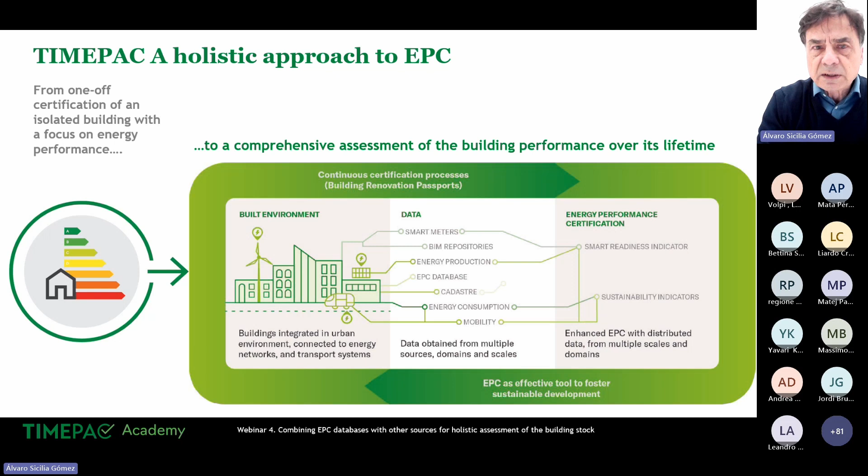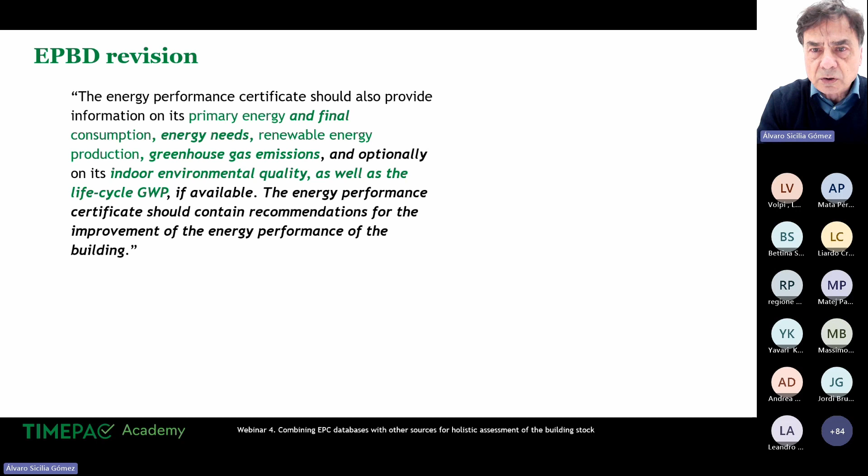So you can see it's no longer only about energy — it's also about comfort, and about sustainability issues, which are already included in the latest update of the EPBD.

In this context, when we are talking about EPCs, or energy performance certificates, we have to see it in a larger context in relation to other instruments. One of them is the Smart Readiness Indicator, which is in a testing phase now, and which aims to complement the EPC.

There is certain overlapping, certain complementarity between the two certificates that are now being explored. But even beyond that, when we consider sustainability in the larger context — the context where we are really operating when talking about energy performance or improving the building stock, sustainability as a whole —

then we have another framework, which is the assessment framework of Levels, which has also been in operation for several years.

And Levels is not a certification, it's an assessment framework to understand all the multiple dimensions involved in the built environment. So we have to see all of this in relationship, because together they conform an ecosystem where many elements are shared and connected.

There are databases, there are tools, there are methods, there are procedures, and all of them towards a common target, which is to achieve carbon neutrality in the building sector by 2050.

If we focus on the EPC here in this diagram, we see that in the EPBD directive, they're asking to store the EPCs in the databases. They're also asking member states to create national databases with that information, which should be connected to the European Building Stock Observatory. So there are very clear directions on how to deal with this data, how to store it, how to process it at the European scale.

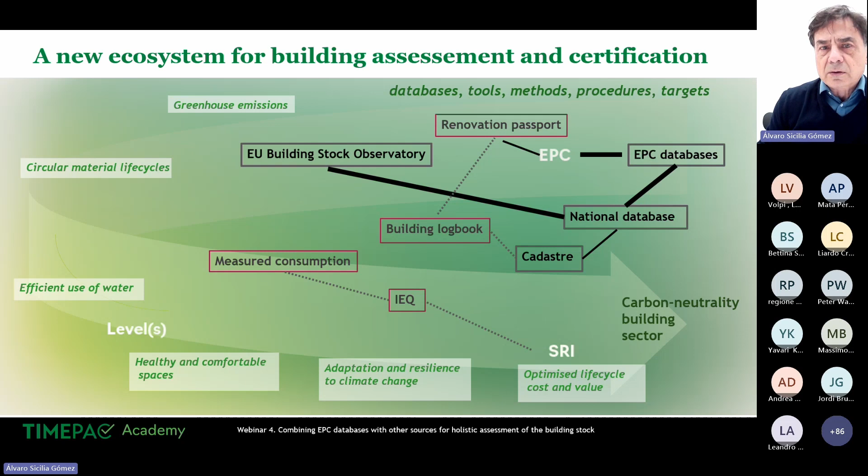This is the ecosystem we have to consider now when we talk about EPCs. Let's take a closer look at the content of each one of these instruments.

In the EPC, the information that should be contained, according to the EPBD, is here listed: primary energy, final energy consumption, energy needs, renewable energy sources production, greenhouse emissions, and if they are available, also the indoor environmental quality and the global warming potential. All of that just to put a label on the building.

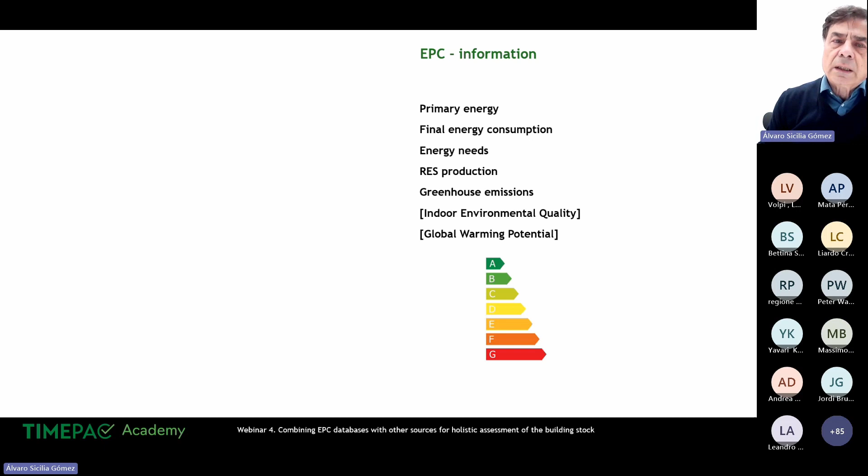But if we take a look at the impact criteria of the smart readiness indicator, the 7 criteria, we can see that there are certain coincidences, energy efficiency for example, but also similar concerns about comfort, convenience, and health. So it has to be solved how these 2 certificates, at the end, complement each other, something that is being explored at the moment.

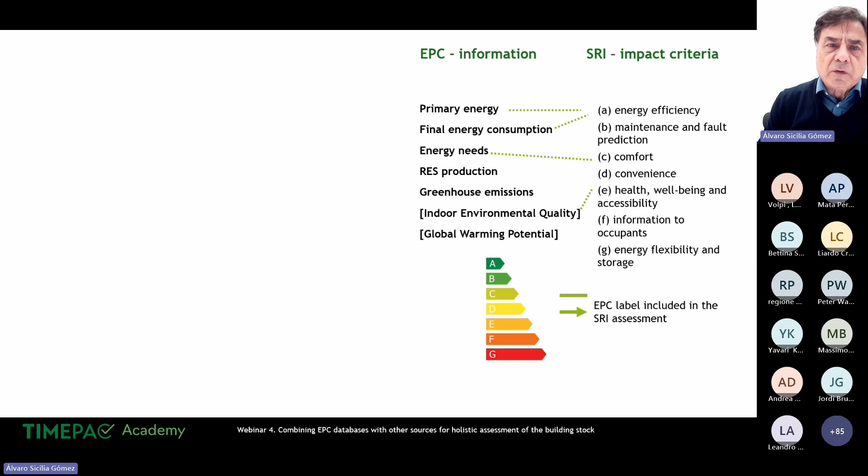But definitely the 2 aspects have to be part of the overall evaluation of the building performance. If we add now the 3rd one, which is the levels indicators, with all the indicators that correspond to the 6 macro objectives, then we have the overall picture. And we could even go larger and include here the 17 SDGs, the 17 Sustainable Development Goals, to have a complete picture of what we are dealing with when we are talking now about building certification and assessment in the context of sustainability.

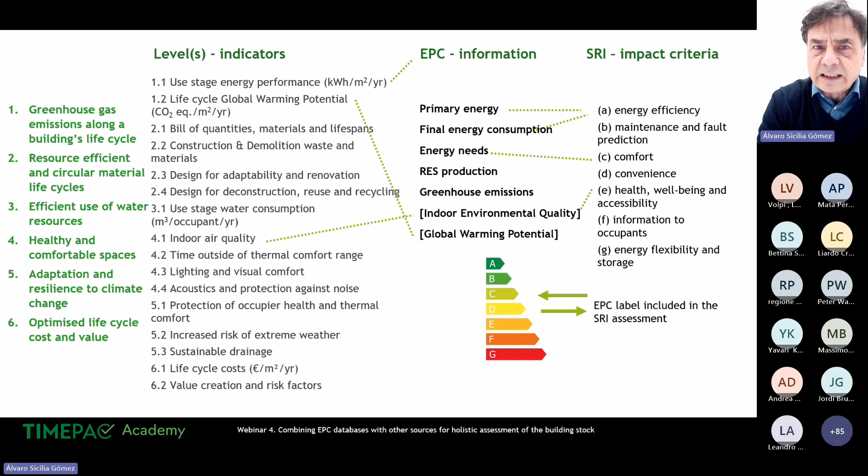So all of these instruments require data. And this data is found in databases from different domains, different scales. And this is where the data is stored, managed, processed, retrieved.

Each one of these instruments, SRI, EPCs, levels, rely on the existence of this data and the quality of this data and the curation of this data over time. So databases in all the different domains and scales are very important in order to implement these instruments.

As you can see here, we are talking about 2 kinds of interconnectivity here. We are talking about interoperability between databases, that, for example, the land register could be related to the EPC database in some way. This is a challenge at the national level.

This has to do with interoperability of databases, but there's also interconnectivity between assessment and certification tools, like the one I mentioned before, between EPC and SRI. Both things are related, of course, because the interconnectivity between the tools can be solved through the interoperability of the databases.

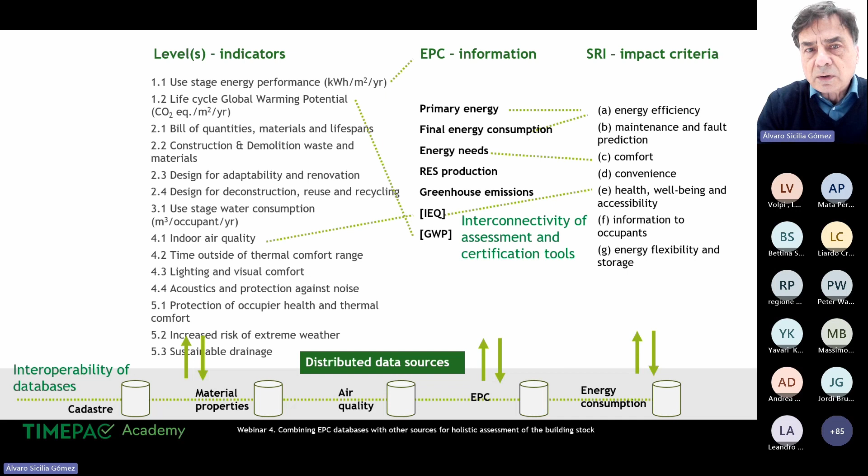So in a way, this diagram shows the important challenge for the future in order to implement all of this vision that is in the EPBD and to make it a useful instrument to achieve carbon neutrality for the building sector.

If you take a look at the latest recast, you will see that databases are mentioned several times. It's written that member states should store all the EPCs in specific databases, that these databases should be also interconnected between them at the national level, that they should also go up into the geographic scale connected to the European Building Stock Observatory. They're also talking about using building typologies or archetypes in order to store the data and use the data.

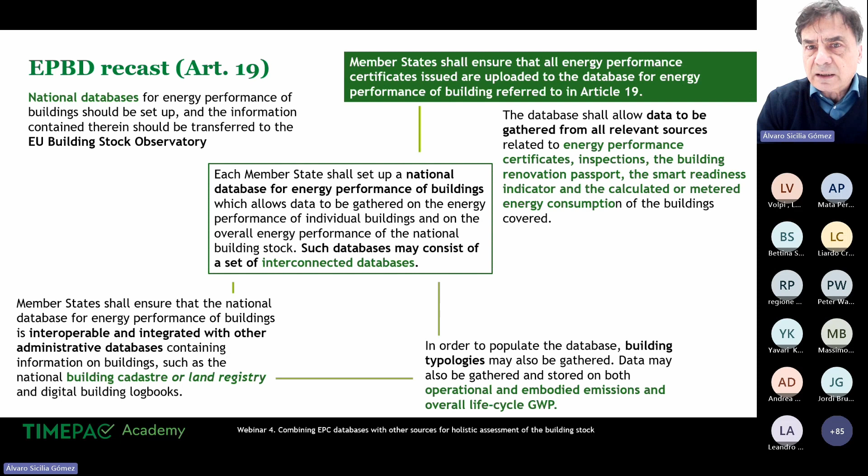So this is a very ambitious objective. It's in the legislation, but at the same time, it's a real research objective. And to be implemented, there are many issues here to be solved about interoperability, about managing the different databases, issues that we'll discuss today, some of them.

So as I said, TIMEPAC focus is on data. This diagram is from the proposal, a diagram that is already 4 or 5 years old. Our vision was that the data flow about energy performance should be a continuous, seamless flow between the 4 stages you see here: the generation of the EPC or certification, the assessment, the storage of that information in databases, the analysis of that information, and finally the exploitation of those analyses.

All of this is a continuous loop over time that at the moment presents many problems and challenges. At each of the stages separately, generation of the EPC is an issue - how to generate it in a more precise way with more accurate tools and data.

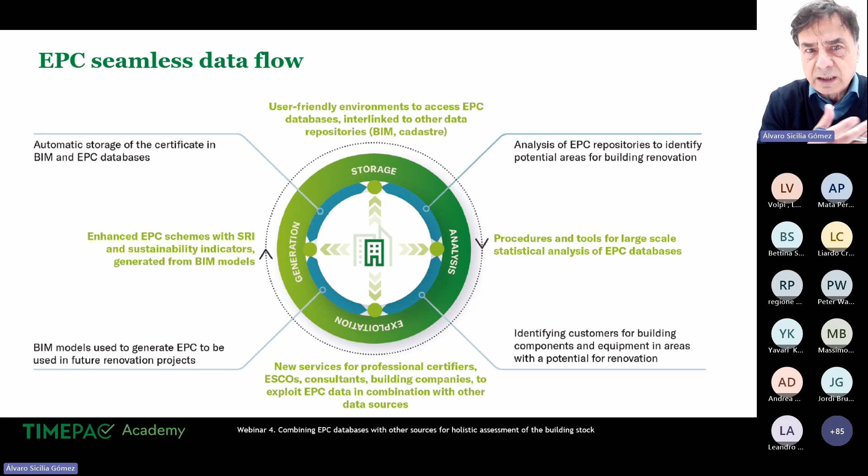The storage is also an issue. Not all the regions and countries in Europe have dedicated EPC databases at the moment. We need very powerful tools. Once these EPC databases exist, we need tools to analyze and understand, to transform the information stored in the databases into knowledge that can be exploited and used through services. To make all of these things connected and running fluently, there are many challenges at the moment, and these are the challenges we were facing in TIMEPAC.

The 5 scenarios: the first had to do with integrating certification tools with BIM. The second was to integrate consumption data, real data, into the EPC evaluation. The third was focusing on renovation passports and EPC. The fourth was about integrating new indicators, as the one we showed before, SRI and sustainability indicators. And the last one is about the procedures to exploit EPC databases and certification to develop large-scale renovation programs.

The webinars we have designed follow the same structure as the data flow I showed before. We have organized the webinars in four stages, starting with generation, following with storage, analysis, and finally exploitation. We have already delivered 3 of these webinars. We are now in the 4th, which has to do precisely with EPC storage, and also introducing the exploitation of that data, which will be developed later in more detail in other webinars.

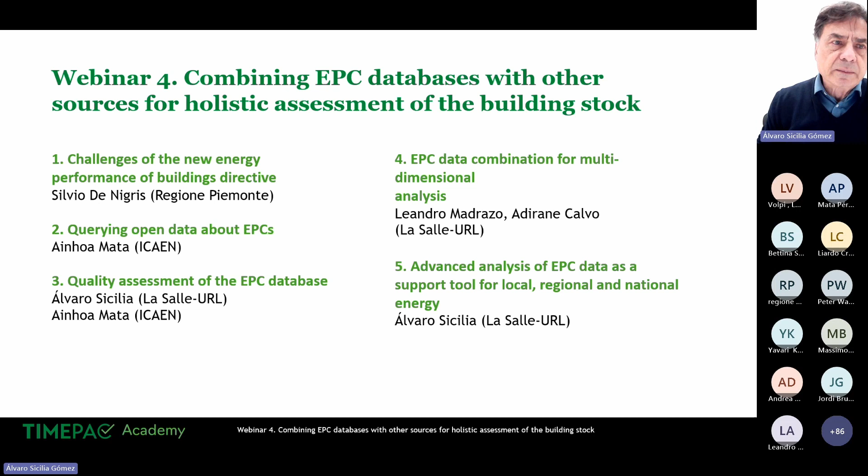I would like now to start with the first session and introduce my colleague, Silvio De Nigris, who will talk about the challenges of the new Energy Performance of Buildings Directive, which was just approved this Tuesday by the Parliament.

Regione Piemonte is the managing authority in charge of driving the energy transition towards a low carbon economy in this Italian region. It is the responsible institution for the management of the EPCs in Piemonte. Silvio is an environmental economist working on the promotion of energy efficiency and renewable energy at regional and local levels. He is involved in drafting the regional energy plan in Piemonte, and also serves as the contact person for the Covenant of Mayors. He has been involved in many European projects, some as a leading partner, often participates as a speaker in conferences at national and international level, and also lectures courses as an external expert. Silvio will give an introduction to some of the main issues included in the new EPBD and about the role of local authorities in their implementation.

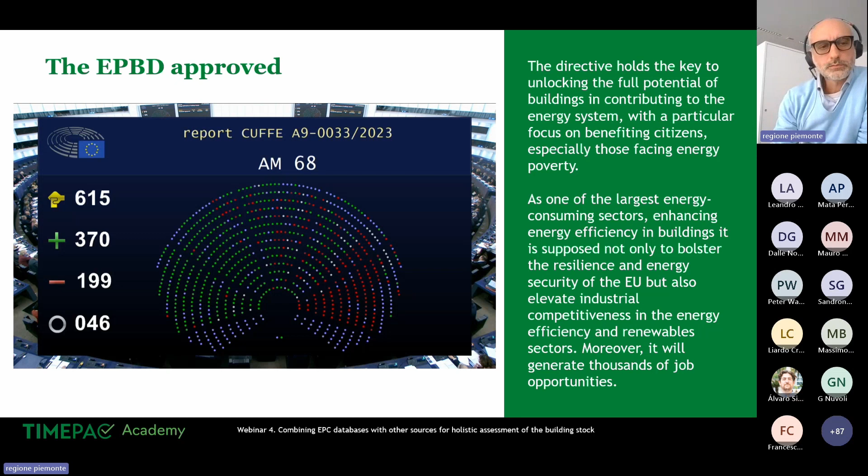It's not only a matter of energy efficiency and renewables, it's also an opportunity for the economy, envisaged as the creation of new jobs and relevant opportunities. But the challenge is very big, and as I will highlight, it's mainly for national government, but also for local governments as well. Let me point your attention to some key aspects that I found very interesting.

First of all, as Leandro already mentioned, member states should provide and draft a national building renovation plan. This should highlight the way member states are achieving carbon neutrality of the building sector by 2050. This is a major challenge that needs to go through several steps.

These plans are supposed to be sent to the Commission by the end of June this year for the first time, and will be updated every 5 years. They should fix intermediate steps and targets for 2030 and 2040. So as you can see, it's a process that is starting - it doesn't end until the target is achieved. It's not a matter of making a plan today and then seeing how to implement it, but it's plan, implementation, check, update, and plan again.

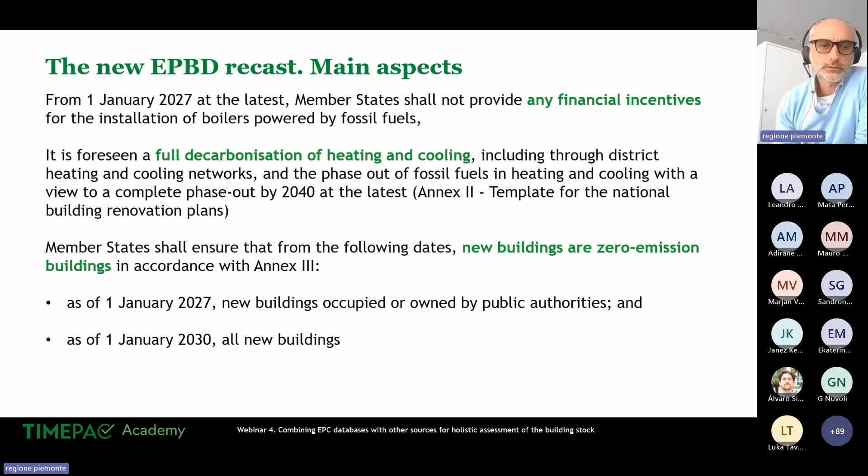As you can see, even here we are completely changing the paradigm and the concept of what is the reality today. New buildings are expected to be zero emission buildings from the 1st of January 2027 for public authorities or public buildings in general, and from 1st of January 2030 for all new buildings.

The EPBD updates the introduction of two other important tools that we started and tried to implement in the previous EPBD, which is the building renovation passport and the smart readiness indicators.

By the end of the year, member states shall introduce a scheme of the building renovation passport, based on a common framework provided by the Commission. What is important is that this building renovation passport for each building will comprise a renovation roadmap indicating a sequence of renovation steps building upon each other, with the objective to transform the building into a zero emission building by 2050.

So it's really a roadmap that we need to implement in each building in order to transform it into a carbon zero emission building by 2050 at the latest. It's a stepwise approach to the renovation of the building.

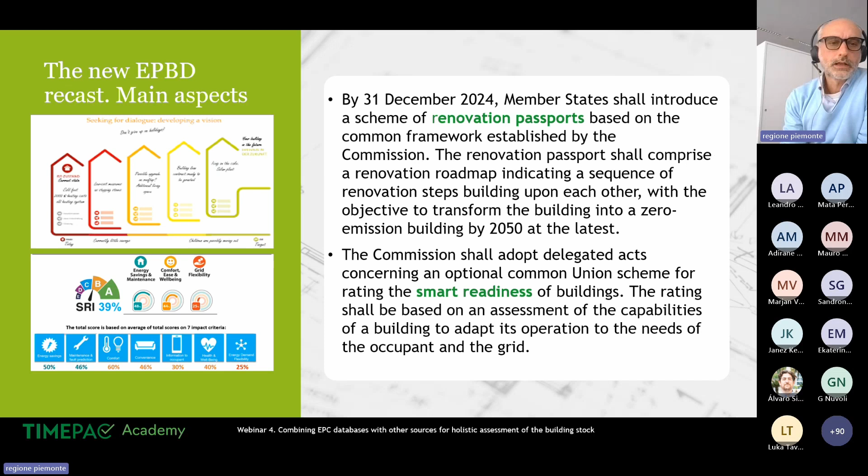For the energy performance certificate itself, it should be adapted to the new rules. What is important is that the A class shall correspond to zero emission buildings, and the G class shall correspond to the 15% worst performing buildings in the national building stock at the time of the introduction of the scale. So there should be a rescaling of the energy classes.

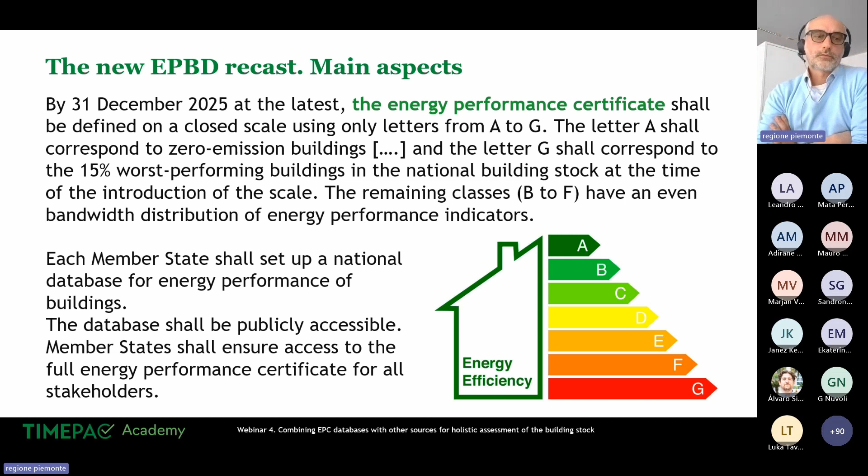As already Leandro said, member states shall set up national databases that should be as open as possible to all stakeholders - again, a call for data-driven actions for full performance and full renovation of the building stock.

We have the new EPBD, of course, but we also have another important step in the legislative revision of the European Union, which is the Energy Efficiency Directive that has been approved recently.

If I match this information with the fact that member states shall ensure that at least 3% of the total floor area of heated and cooled buildings owned by public authorities and public bodies at all levels should be renovated each year to be transformed into zero emission buildings, and that the public sector is also asked to provide at least 1.9% reduction in energy consumption each year compared to 2021.

There is really a new and urgent call for local energy planning at the local level. As I said in my introduction, this is not really energy planning, it's energy transition planning. We should really change our mindset when we make a plan - it's not about understanding the trend and what will come in a few years, but having a target which is a completely different energy system, and understanding how to get there, completely changing the current situation.

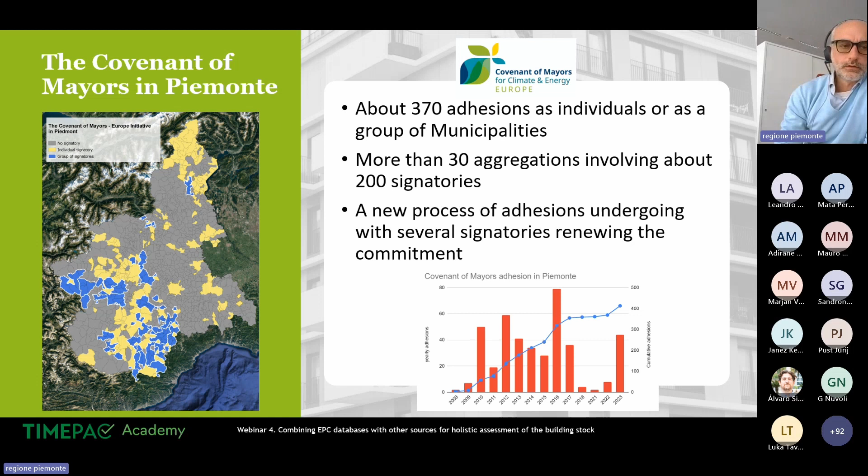But last year we had a promotional campaign to our local authorities, which was quite effective, and so we had newcomers in the network, and again we should improve this, because I think it's really important that municipalities do their job at local level, although they are small. In this case, we advise them to aggregate, so work together with neighbors in order to create some aggregation that makes planning at local level more easy and also effective.

What we do is support the municipalities in different ways in the planning process, for sure, providing them data and information, and in this way we are acting as a kind of energy observatory, and I will show you soon the concept behind. But we are also supporting them in the implementation phase of the plans with financial support while renovating public buildings, or also using European projects to implement new actions that can benefit municipalities directly.

Also the new concept of renewable energy communities is at the top of our priorities in this month, and we will try to push the change in different ways.

So I said we are acting as an energy observatory in terms of data. In the past we had this situation where several municipalities were asking data information from different data providers. This was quite a complicated situation where data providers were answering different requests coming from different municipalities. The concept that we introduced is to put ourselves in the middle.

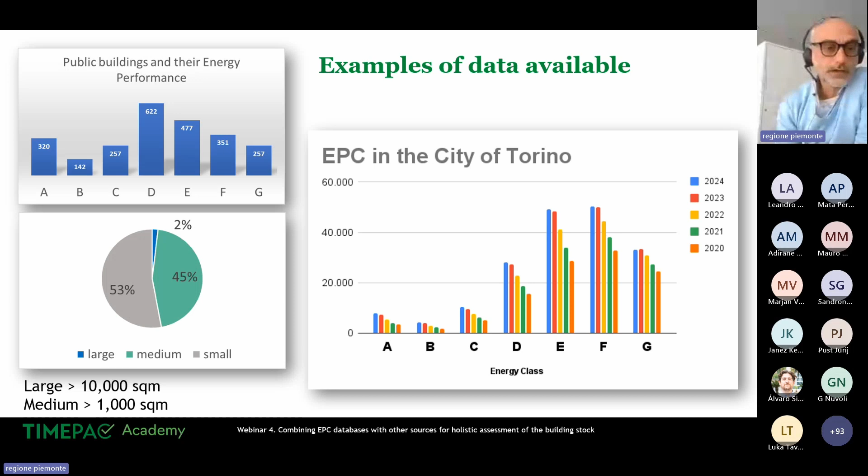So the challenge ahead is really huge, and we need to find a way to speed up the process as much as possible.

If I go with the takeaways: the call for planning is really strong from the EPBD and the Energy Efficiency Directive, and this is not only for national government but also for regions and municipalities. We need to stress the message that it's not something that member states can do themselves and alone. We should work in the same direction at every level of governance.

Data are essential to lead the process, and data should be available and provided in an open format as much as possible. But also, what I stress is that it's not a matter of just giving this data to municipalities, it's also about supporting them in understanding what they can do with it, and supporting them in the planning process, as we are trying to do in the best way.

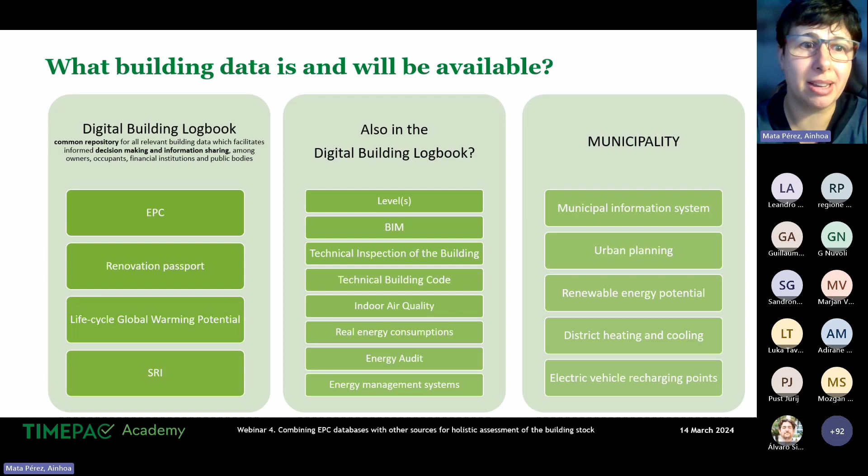The information set in the EPBD recast is that this digital building logbook will include the EPC and also the renovation passport, which will be a voluntary document. The different governments will have to develop it and give the opportunity to do this renovation passport, but the use of it will be voluntary.

It's a roadmap to achieve a big renovation, so that the existing building becomes a zero emissions building, in several steps, in order to renovate the whole envelope and the appliances. So we can do it in several steps in order to help finance the renovation.

And there will also be a new concept, the life cycle global warming potential. Nowadays, we know how many emissions are emitted during the use of the building.

Thanks to the EPC, it's a calculation, but at least we have some numbers. And we will have to calculate it during the life cycle of the building, from the materials to produce the construction products, the use, and also when we finish the use of the building. I think it will be included in the EPC, but we will see how the new versions of the EPCs will be.

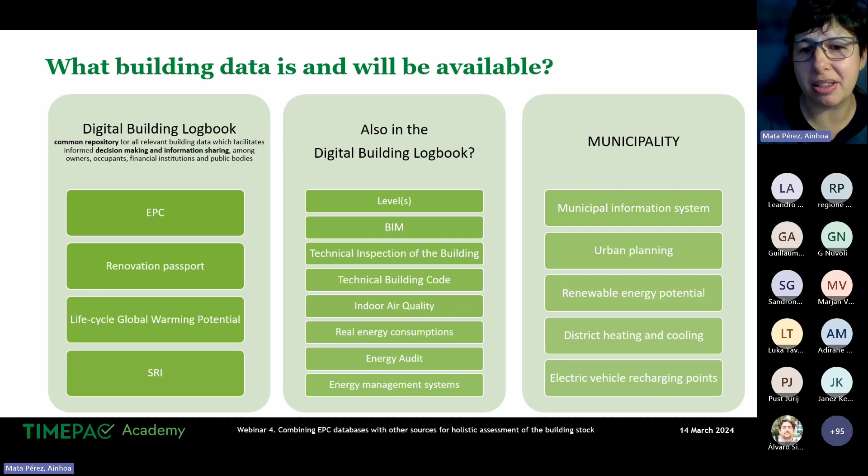So there's a lot of data, and we are, I think, on the way to get it. There's a lot to do, but I think we have also advanced a lot.

For example, when I started in ICAEN 15 years ago, we had the EPC register that had started one year ago, and all the documents and the EPCs were in paper. So, well, there's a lot of things to do, but we have also done a lot.

So there are different ways to access the EPC register in Catalonia, depending on what we want to get, and this is related to the user that wants the information. For example, the first way to get information is with the search engine, where we can look for one EPC at a time. We can search with the cadastre, the address, or the EPC code, and we can get the EPC without the personal data of the person that did it, and also the label.

So it's, I think, the most used part of the Catalan Institute website, because people want to get the label and the EPC — citizens that want to sell a house, EPC certifiers that have just done the EPC and need the label, or notaries that need to see if this label is correct, is registered, can consult this website. And it's aligned with the EPBD recast that tells us we have to give access to the data, and it's also aligned with the digital building logbook.

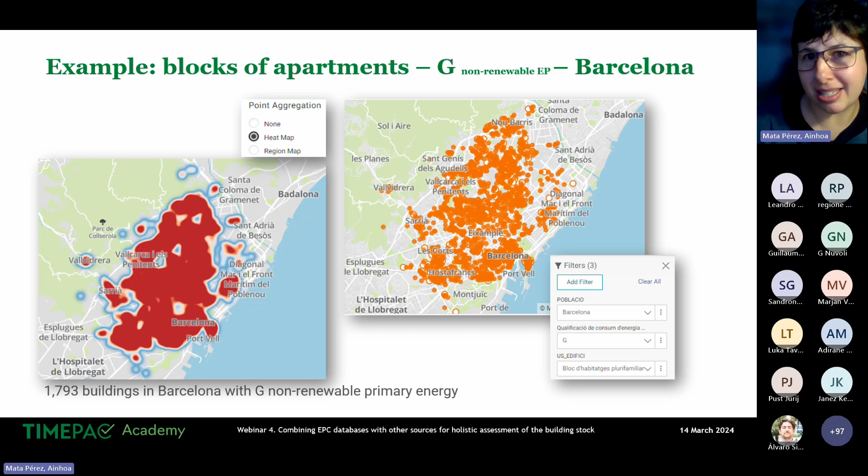We can see not only graphs but also a map with the same type of consultation using open data. This is a consultation about block apartments, not all buildings, but only block apartments that have a G rating with non-renewable energy and primary energy, from Barcelona. For those who know Barcelona, we see a difference in the number of G labels because, for example, there's a neighborhood called Poblenou that is newer than the rest, and they have fewer G labels.

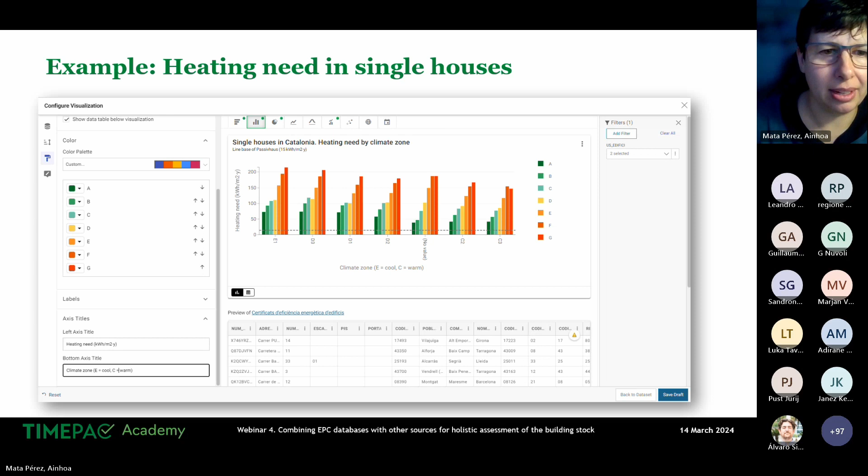And some takeaways: nowadays we have the EPC register in open data. It's aligned with the EPBD recast that says we have to have transparency with the data, but we have a lot of challenges. For example, to learn how to use this open data so it can be useful for different people. I don't know about citizens, but I'm sure it can be very useful for ESCOs, for public bodies, for EPC certifiers.

And we also have to relate the data much more, not only with the cadastre. The way, when we'll have more data in open data, we can also make these relationships with the EPC. And it can be very useful for the National Building Renovation Plan, as the EPBD said.

Also, there will be some questions that I don't know how will be resolved, but with the EPBD recast, there will be a new scale of the EPC. So we'll see how we have this relationship with the existing buildings that already have a scale, a label, and the new ones, we'll see. And one thing we'll speak on now is how to improve the data quality, which is really important to get trust in it.

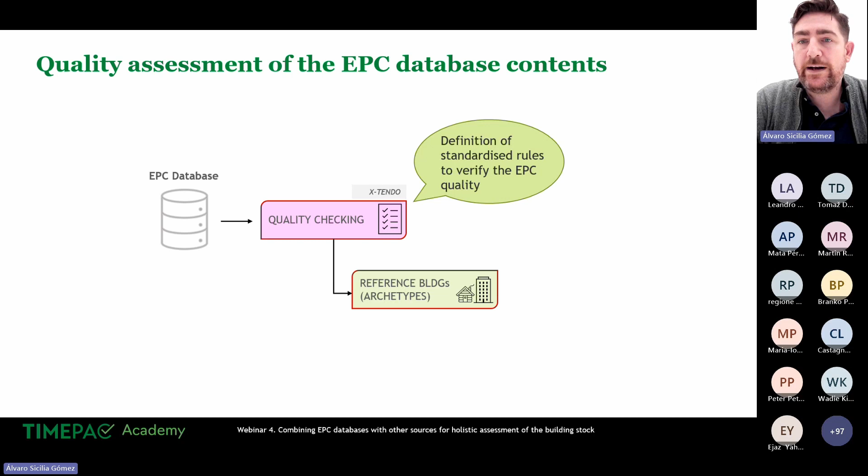For this quality checking, we created some validity rules to understand, for example, if the data type is okay or not. For example, for the year of construction, I am expecting a number between 0 and 2024. If I see a text, then this is wrong. If I see a decimal value, this is also wrong. So this is the kind of rules we are checking. Also inconsistencies, like having a heating system in my building but the heating demand or consumption is 0, for example, and also physical impossibilities.

These are the critical parameters that we are checking: building use, year of construction, heating volume, refrigerated volume, heating demand, the consumption, and the performance.

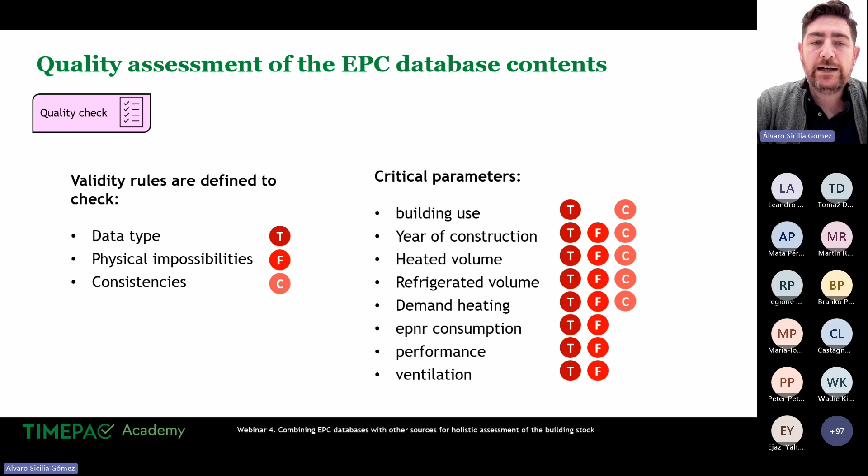I wanted to show you one of these examples. These rules were created with a tool made by the Politecnico di Torino team, an Excel tool that you can use to check if the EPC is okay or not. There are several formulas checking more than 100 columns to carry out this assessment. We translated this tool into SQL, which is the language for talking with databases, because the database of Catalonia is very big.

I already mentioned that there are more than 1,400,000 certificates. So here you can see one rule.

The rule is the following: if the building is heated, then the heating surface and the heating volume have to have a value, and the height of the space should be greater than 2.5. This is according to one of our regulations.

Here you can see the code, which I'm not going to read because it's not the point, but you can see that we are checking different things: if it is 0, if it is not null, if it is the division, and so on. So it's work that is hard to do, but at the end it has rewards.

Another rule is the heating efficiency rule. Here we check if the building has a heating system, then the efficiency should be greater than 0 or not null, so it has a value. Or if the heating system is not in the building for whatever reason, then the efficiency should be 0 or should be null. So these are other tools, other rules for checking all these EPCs, if they are okay or not.

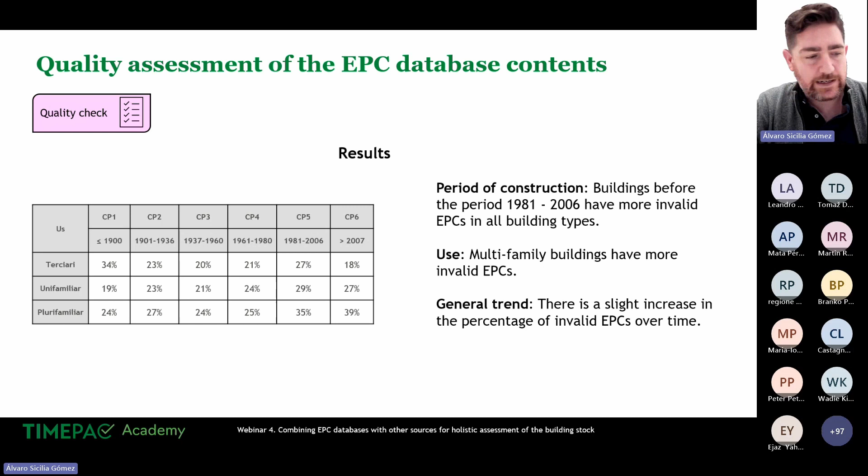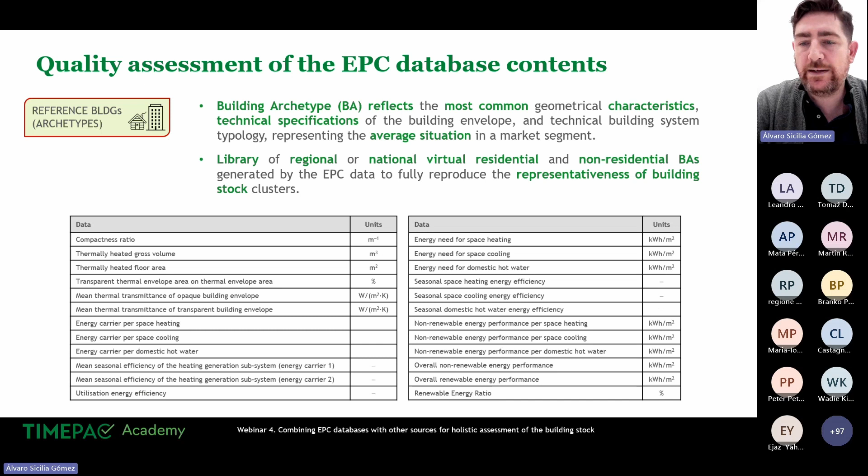Since I am running out of time, I will go ahead. Another tool that we have to carry out the building renovation programs are the archetypes, the reference buildings. In the TIMEPAC project, we defined several archetypes for every region. It's work that was led also by the Politecnico di Torino. Here in Catalonia, we developed more than 20 different archetypes based on different years of construction and different properties. This will be further explained in the next webinar, next Wednesday.

So now I pass the word to Ainhoa to explain the quality of EPC in the Register of Catalonia. Thank you. Thank you again.

Well, it can be very broad to think about the quality of the EPC. How can we improve it, and who has to do it? Because we have the register, but the information comes from all the EPCs done by certifiers. So one important point is that the information they introduce in the tools is correct. The part of the training, I think, is really, really important to get this quality of information.

Nowadays in Spain, there's no compulsory specific training to become an EPC certifier. It depends on your background. If you are an architect or engineer, you can do the EPCs. This could change in the future because there's a new regulation that will tell us exactly if there's compulsory training or not. We'll see.

And there's another part: the EPC certifiers tell us that the EPCs should be better paid, so we can dedicate more time to get this quality of the EPCs.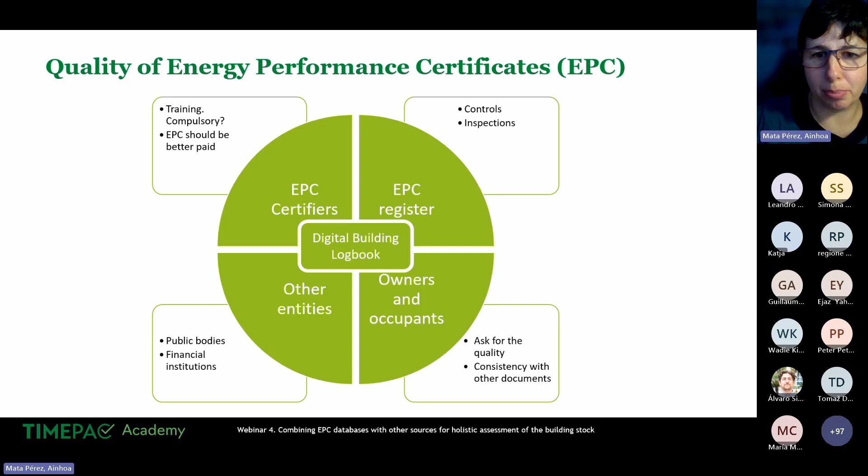In the EPC register of Catalonia, we have a website with a lot of information. In fact, last year we were in a project where citizens and also EPC certifiers evaluated our website. And they said, well, there's so much information that it's difficult to get the one I need. So we have to do this work to improve the friendliness of the website.

There are also FAQs, documents specific to common mistakes made with the EPC, explanations about the different procedures, and access to open data.

We have also alarms in the registration form, so we can see if there are some parameters that are not correct before we get the information in the register. This is very important to save time for everybody. These alarms can give you a message of warning, so it's important to see this parameter.

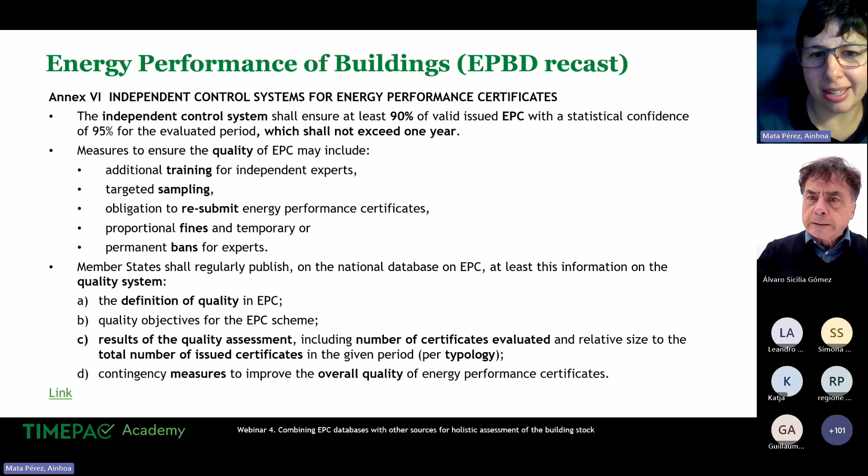The takeaways about this part would be that EPC databases will include new data, as we saw before, with new indicators like life cycle global warming potential or SRI. They will have to be linked with other databases, and we have new challenges, like the new regulation coming in Spain, where perhaps it will be compulsory to do training in order to make EPCs.

It's important that there will be more cooperation with other public bodies to improve the quality of the EPCs. We want to do some YouTube videos explaining the most common mistakes, from ICAEN. The EPC needs to be more friendly and comprehensive so owners will ask for more quality, and of course, more controls and inspections. And I give the floor to Leandro.

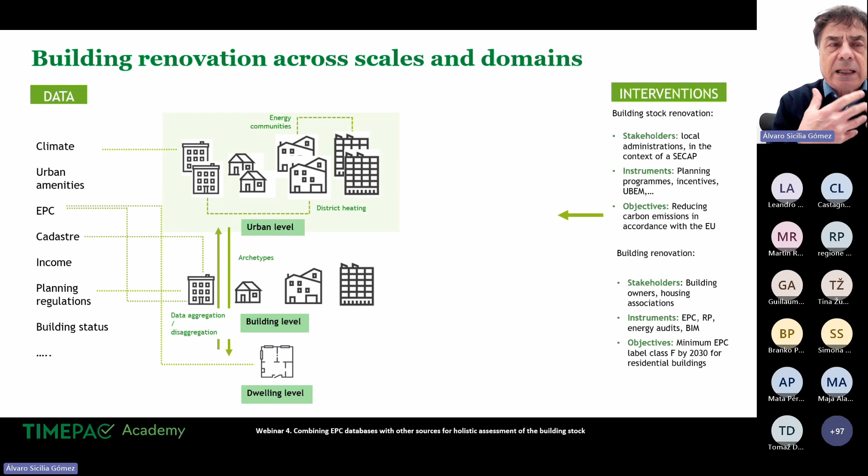Then we have the interventions. We analyze the building stock comprehensively with the data we have in order to improve it: where to intervene, with which measures, with which impact. These are key questions that local administrations or other private entities might formulate in order to upgrade the building stock. There are stakeholders like local administrations, and there are instruments to be used, like planning instruments or UBEMs, both at the building level and at the urban level.

In order to do this analysis, we need to connect the data with indicators and with our objectives. So when we have a particular objective, like reducing carbon emissions in accordance with EU regulations—as a municipality, for example—we need indicators like energy efficient or energy recovering homes, or median income, indicators that allow us to understand the complexity of the issue, not only energy performance but also other economic and social issues.

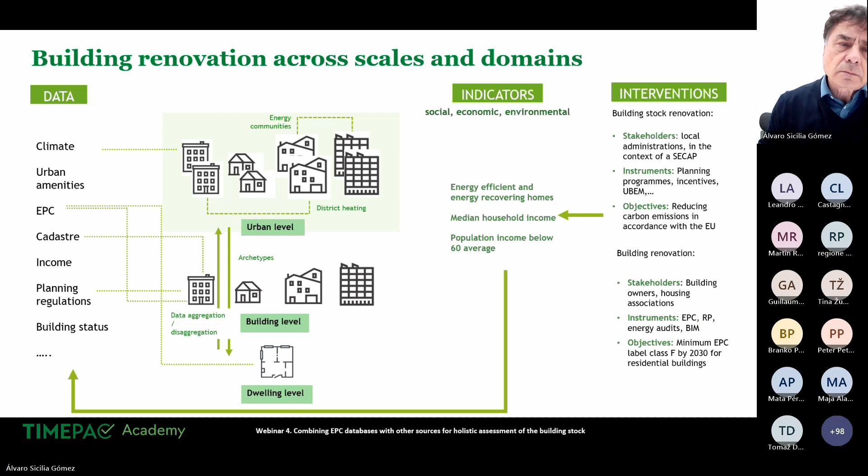In order to apply these indicators, we need data, and data has to be retrieved, and indicators have to be designed and defined in order to understand the problem we want to solve. To make it simple, we have two issues: one horizontal and one vertical. In the horizontal line, we need to align our objectives with the indicators and with the data. We can start wherever in this line, but the three have to be aligned, in accordance with each other.

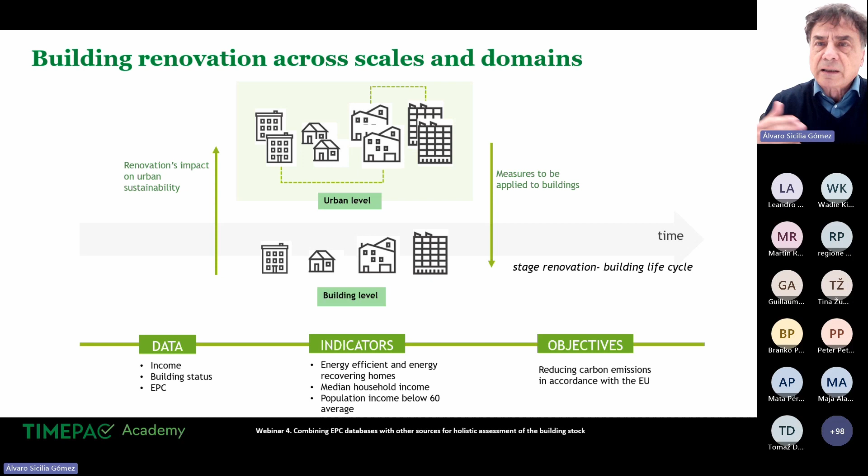Then when we come to the interventions, the vertical dimension of this diagram, we have to know what the impact is at the urban scale—social, economic, etc.—of the measures we take at the building scale. Conversely, when we develop a large-scale renovation program, we need to develop strategies—economic, social, and physical renovation measures—that affect the individual building. And there is time, because this iteration is not only a loop inside itself but also evolves over time, since buildings are renovated over time, and we consider the life cycle of the whole building.

In Retabit, we try to address this complexity, thinking of the building as part of a larger environment. This is the schema we presented in the proposal of this national research project that we are developing together with the IREC Institute, the Catalonia Research Institute of Energy, here in Catalonia.

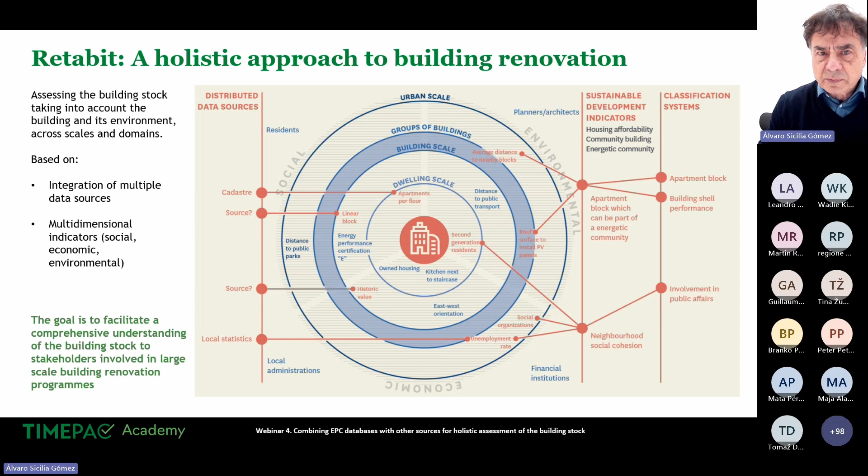So basically what we wanted to do is to assess the building stock in order to integrate multiple data sources and develop multidimensional indicators addressing the complexity of the renovation of buildings. The purpose of the Retabit project, which is still going on, is to develop a data-driven service platform to evaluate the current status of an urban area with the purpose of improving renovation of buildings, and second, to elaborate and assess the impact of the renovation scenarios that are simulated.

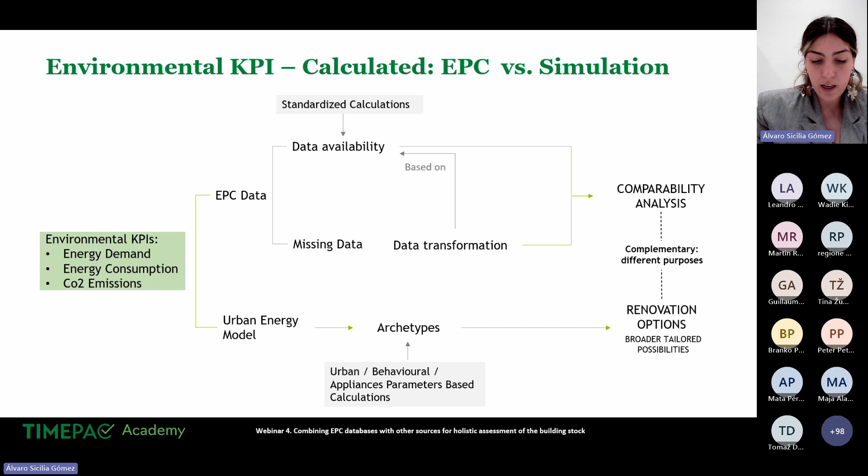Due to the standardized calculation, the KPIs coming from EPC data are suitable for comparability analysis. However, due to the possibility to change all the parameters within the archetype simulation, this path is more suitable for renovation options. However, they are complementary and can also be studied and compared between themselves. The simulation KPI could be, for example, the final energy consumption, and the EPC KPI could be achieved by using the EPC data based on 3 different scenarios.

The building has an EPC, some of the dwellings have EPCs, or none of the dwellings - not the building - have EPCs. In the first situation, we have buildings data that can be directly transferred to the Retabit KPIs because we use the buildings as the basic unit.

In the second and the third cases, we have to calculate the Retabit KPI as the median value of the EPC data from each dwelling of the building. And because we don't have the data, we have to estimate it.

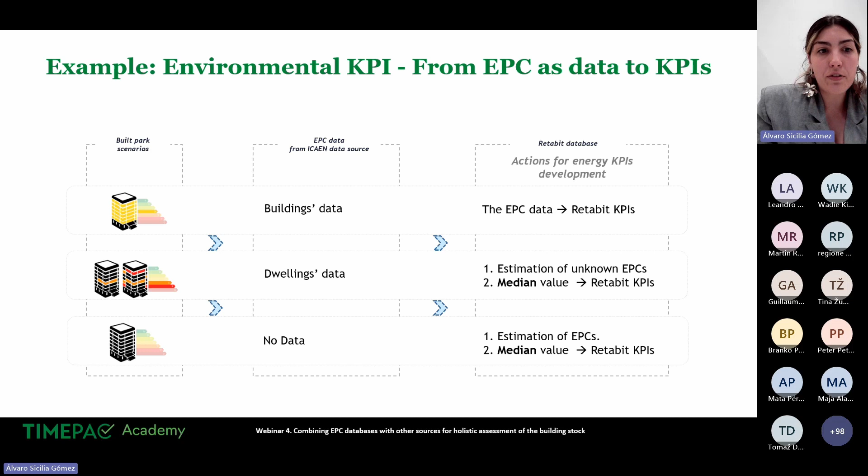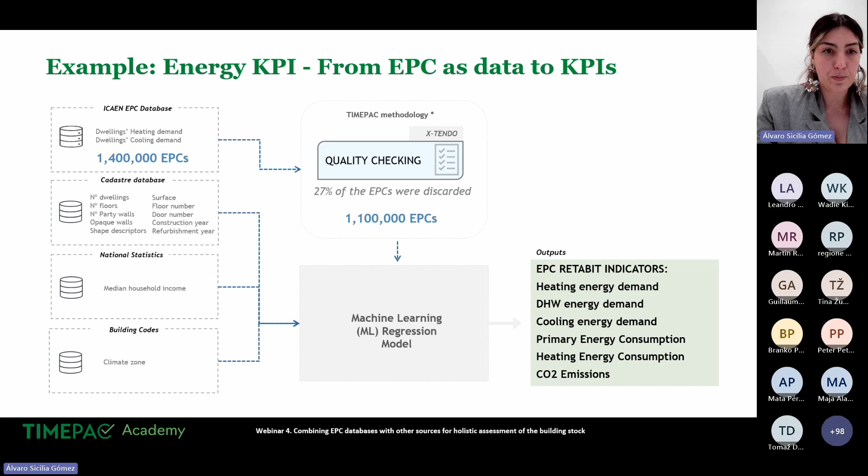Here I have some other examples of social KPI calculation, but I'm going to pass directly to the combined KPI.

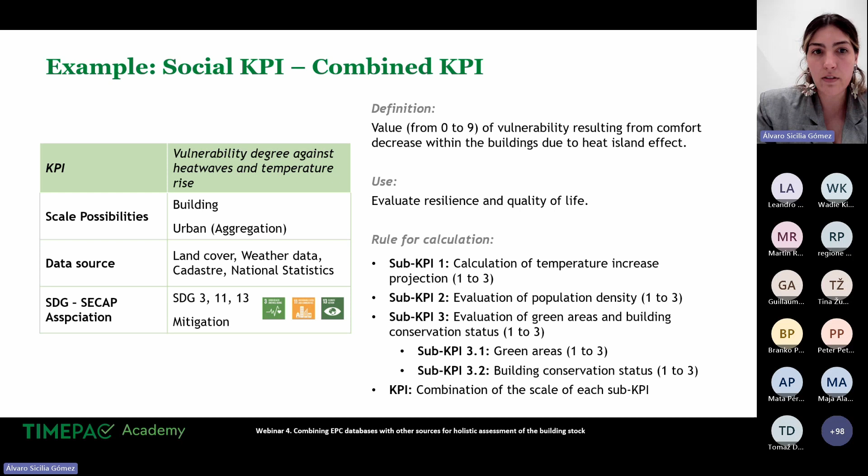For the combined KPI, we have the example of the vulnerability degree against heat waves and temperature rise, which is the vulnerability value resulting from comfort decrease within the buildings due to heat island effects. It is used to evaluate resilience and quality of life, and it's a combination of 3 different sub-KPIs that have their values standardized from 1 to 3, giving us a value from 0 to 9, being 0 the lowest vulnerability and 9 the highest vulnerability.

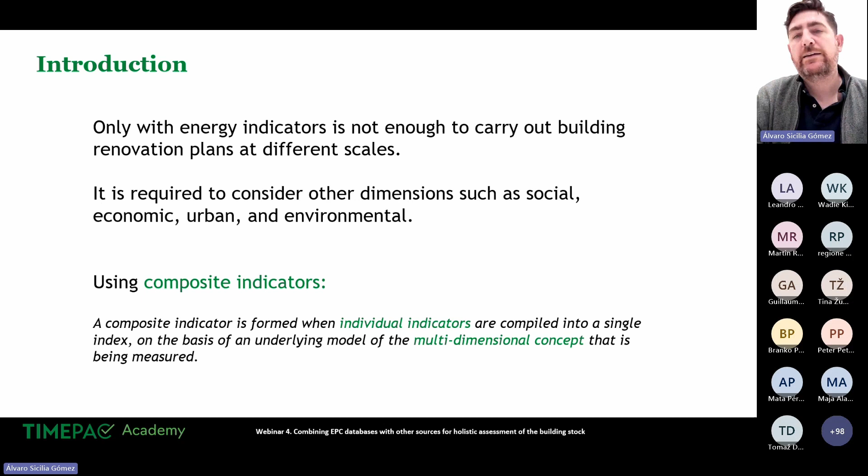So let's first start with the basis. A composite indicator is formed with individual indicators that are aggregated, compiled to understand the multidimensional concept that we are exploring.

The purpose of this composite indicator is to simplify the complexity that we're going to analyze. Also, to facilitate comparisons, we can create two plans, and with this composite indicator, we can say maybe plan A is better than B. Also, this indicator will offer qualified understanding of multidimensional issues. So we're not going to see only one dimension, we're going to see, for example, 3 dimensions at the same time, or 20 dimensions, depending on the indicator.

So how is this indicator created? It's a 4-step process. First, we need to identify which sub-indicators we're going to use, 3, 4, whatever. For example, if we want to carry out a building renovation program which has a social impact, the indicators would be the energy consumption for the buildings, the building status, and also the vulnerability of the people, the household income, for example. So there are 3 different indicators. This is the selection.

Then we need to normalize. Normalize, what does it mean? That the values of the indicator should go from 0 to 1. There are several ways to normalize, and I'm not going into details.

And then we need to weight the indicators. Weighting means to identify which indicator is more important than the others. For example, I am an urban planner and I'm going to do this building renovation program for social impact. Maybe I'm going to say that the family income is more important than energy consumption, because I want to address these issues of vulnerability. So I need to specify the weights for each indicator.

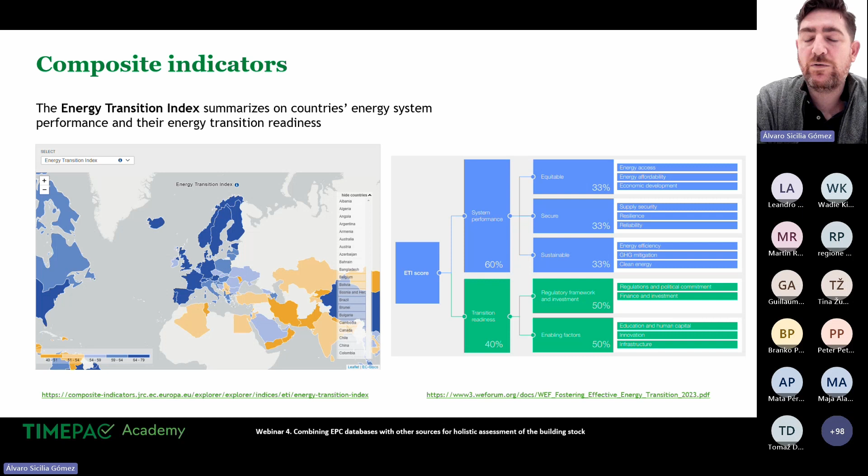They have a very interesting portal, and the URL is there, where you can navigate and see some scoreboards, some indicators. They call it an index, but it's the same. There is the Energy Transition Index, which summarizes the country's energy system performance and their energy transition readiness. There are 14 different sub-indicators that are aggregated to get this final energy transition index for most countries in the world. The percentages you can see on screen, 33%, 50%, 40%, 60%, are the weights they use to aggregate the energy transition index.

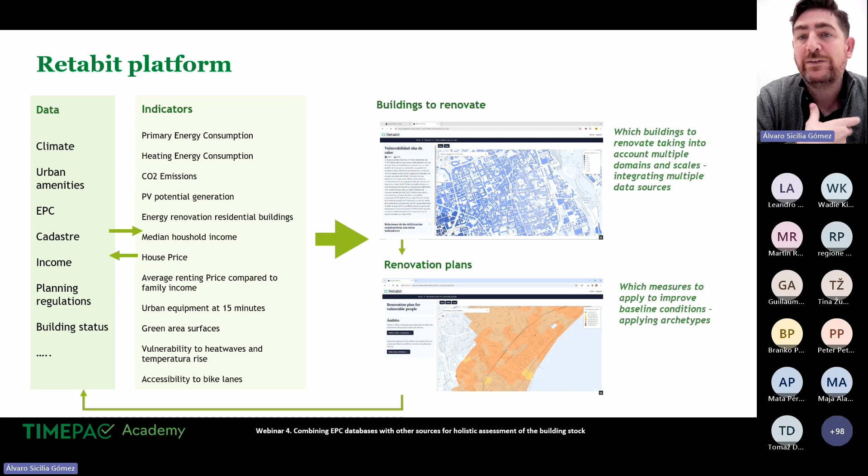So we bring this idea of composite index to the Retabit platform, in which we have more than 16 indicators, to enable the urban planner to create their own composite indicators to understand the reality of their cities. So here are some examples.

For example, let's say the urban planner wants to identify areas that have low urban and building quality, and where the people who live in those areas have some economic issues. In the Retabit platform, we get data from the cadastre, from the national statistics, from the land cover, also weather data and household rental prices. All of these data sources are integrated in the Retabit database.

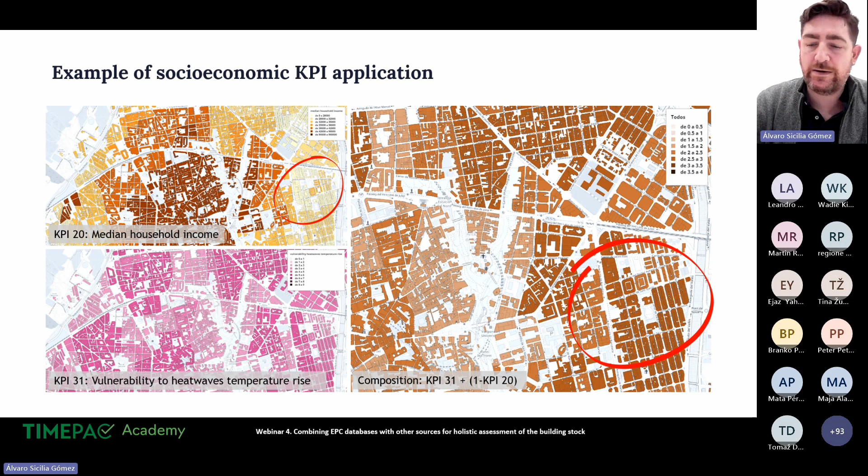For this particular question, we can address it with the median household income indicator and the vulnerability to heat wave temperature rise. Here are some maps. The left maps are the individual indicators, and the right map is the composite indicator, where we put together both indicators. The urban planner can focus on the darker areas, which have more priority to carry out this renovation program. I will skip this one.

Also, if we want to answer a question that requires data from different dimensions, socioeconomic, social, urban and energy, the question would be: where are the areas where vulnerable inhabitants live in non-efficient buildings, with an urban context that doesn't enhance energy efficiency? To answer this, we need data from different sources, as we saw before, and the indicators we will use are the median household income, the green areas, and the heating demand.

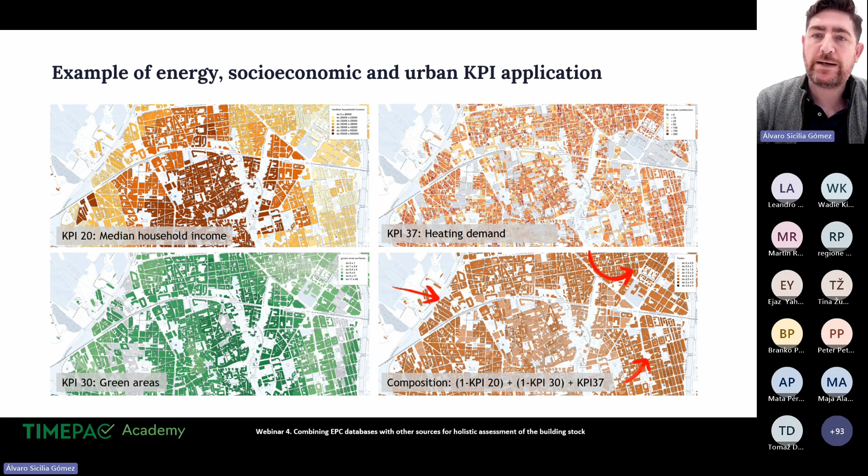So how do we implement this composite indicator in the Retabit platform? Here on the screen you can see the mockup. It's a functional mockup that has been implemented as a website, the same one that has been shown by Adirane.

Here you can see, for example, the house price at census unit scale. You can zoom in and see this indicator for all the buildings we have in the municipality. On the left side, you can click on this button to create the composite indicator.

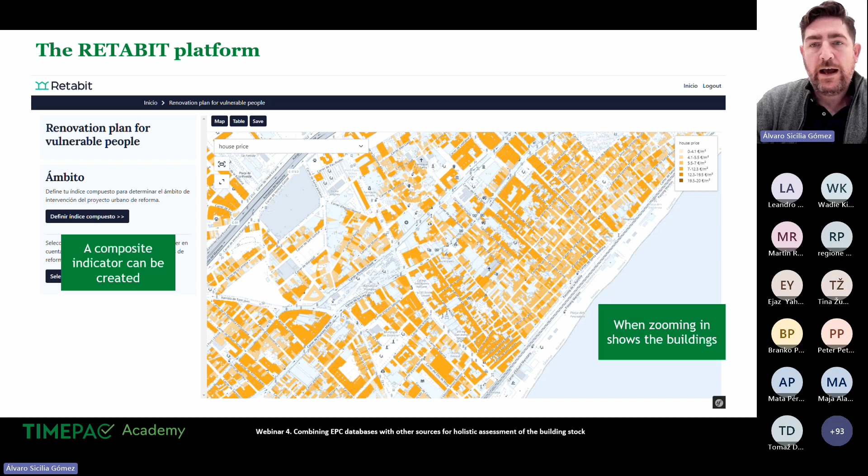A new pane is displayed for the user, and on the left side in blue you can see all the indicators we have. The user can click on the indicators, drag the sliders to define the weights for each one, and the map will recalculate all these composite indicators in real time. It's a pity I can't show you live, but these calculations are very fast.

Also, every time the user modifies an indicator it is recalculated. But here brings one important issue: how can the urban planner select the indicators, because there are so many, they have to read them and it's difficult for them.

So we have created an artificial intelligence module in which this module will take a description that you can see here on the left — the same question I showed you before. The user can input this description, the AI module will parse it, and then pre-select the indicators for the end user. The end user can change the selection if they want.

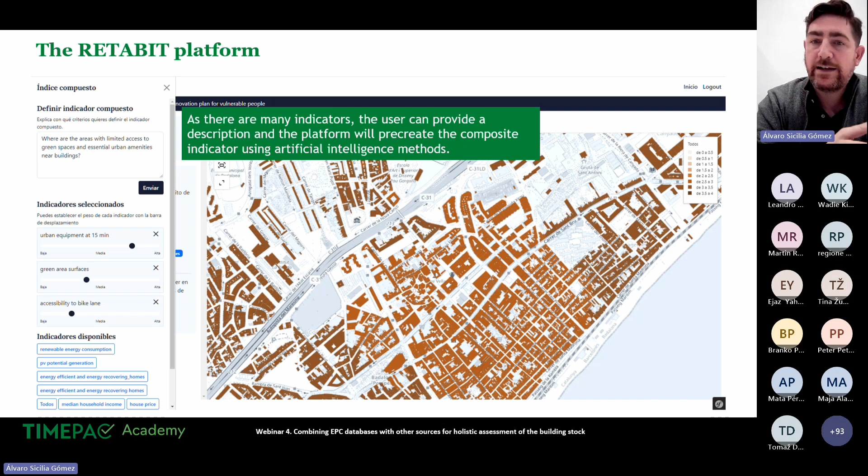But at the end, this pre-selection will help the user understand the indicators and have a better experience working with the interface.

Once you come back, these composite indicators can be calculated at different scales. It's the same composite indicator we saw before, now at the census unit level. Once you have the composite indicator, you can also visualize the sub-index.

For example, here I'm seeing the median household income, or the energy renovated buildings, or the vulnerability to heat waves. So everything is in the platform, and the user has the power to visualize the composite index or to visualize the individual sub-indexes.

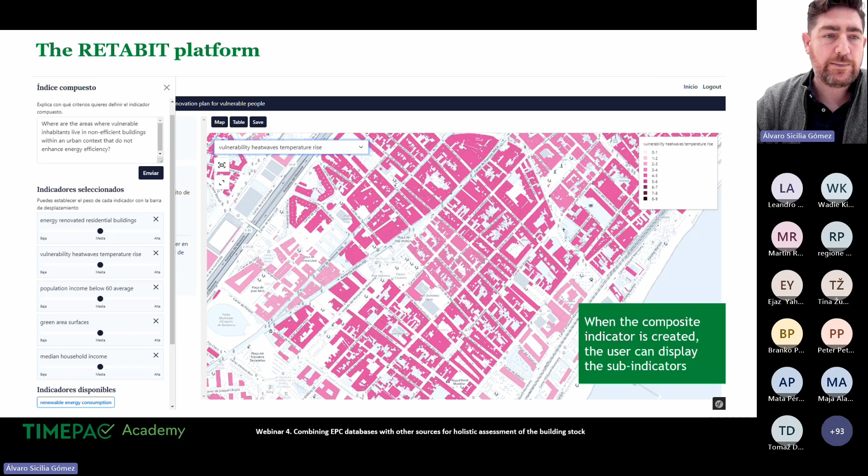So just to finalize the presentation, the final takeaways: this tool, the composite indicator, is not new, but it's important that we can use it for our building renovation programs. It's something that has some risks, because it might oversimplify complex data. So as an end user, you need to understand how it works and what you are seeing.

And also I wanted to bring up another thing: artificial intelligence tools, like the one we are integrating in the Retabit project, can help the end user understand the complexity of creating building renovation programs at different urban scales. Okay, thank you, that's the final slide. Thank you for your time.